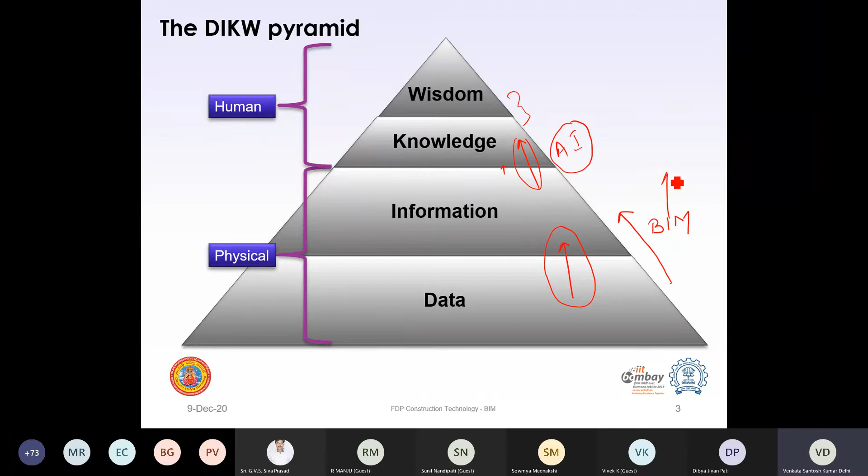How to structure data into information, and this is where probably BIM comes into the picture. So we will talk about this whole idea, and that is why this I stands for information. This is information because we are trying to structure a lot of data which is present in my site into certain structured, layered models, what we call building information models. We will talk a little bit more on this.

But if you forget everything I am blabbering out here in this presentation, you should understand this: there is data which we are trying to structure, and BIM helps in that. And if we try to take some knowledge-based decisions on it, then we are entering the realm of artificial intelligence, etc. And machine learning probably helps you to process information into knowledge, or probably process data into information. So it's essentially the tool which you use to do that. So we will talk a little bit on all these things in this presentation. Let me see. Okay.

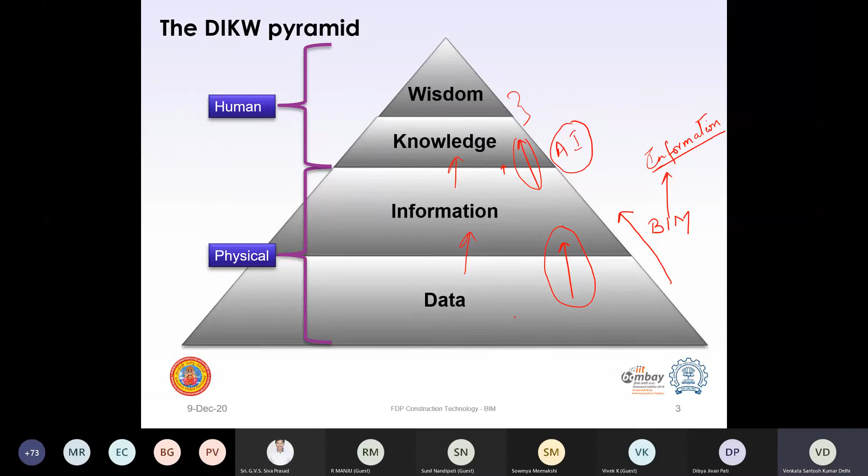So what is the key challenge in our construction projects? Okay, so people have come up with so many things. People say there is a lack of money, there is a lack of human resource, etc. But I would say the key challenge on our construction projects is handling the data and information.

Okay, so let me give you one example of this. I hope many of you would have looked at this kind of figure. In fact, in the management context, this picture is probably one of the most abused pictures of our times. So I have taken a shot at this myself to look at the story of our construction projects. Okay, so this is what it is.

Okay, this is how the customer described to a project manager, saying that I need a swing, probably 3 steps. I don't know why that is required. Probably he has 3 kids, but I don't know why that is. But this is how a customer described to a project manager. Now, how did she understand? This is how the project manager understood it.

Okay. Now, what's the problem with the second picture? There is nothing you can do. You will go and hit the trunk, right? There you cannot swing. Then this became a real challenge. Now, what is an information challenge? Because you did not translate the requirements properly, it will become an engineering challenge.

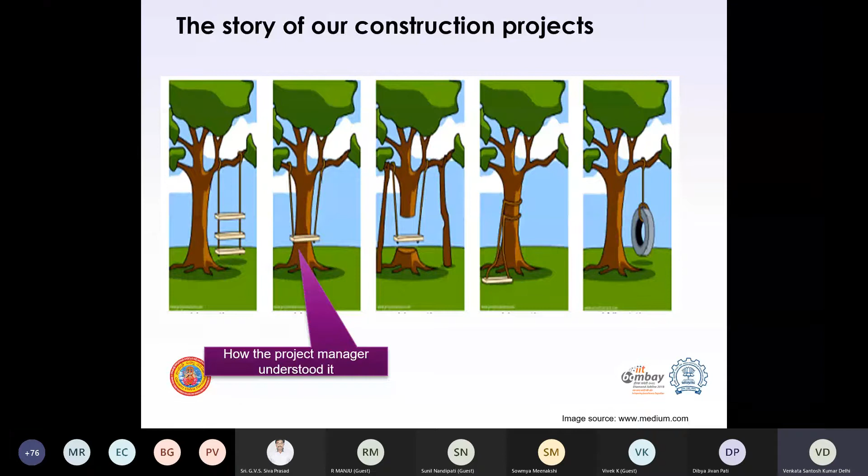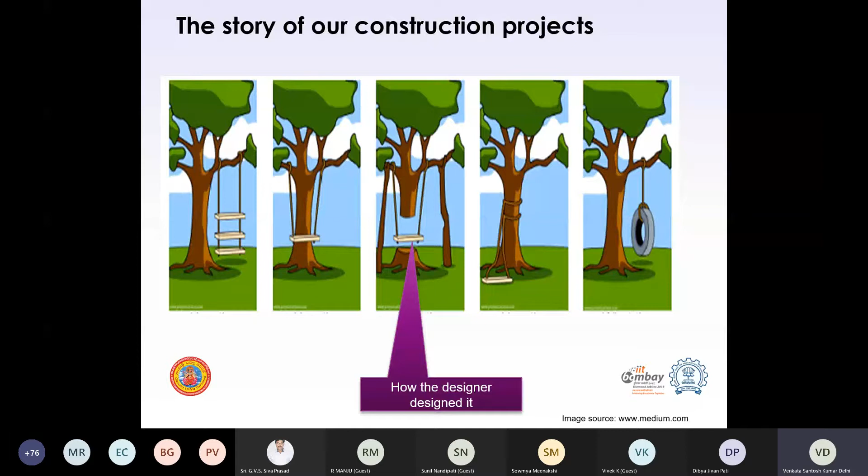That's what happens. And this is how the designer designs now, saying that, yes, the customer wants it right at the middle of the trunk. Customer is God, customer is important, so we cannot violate that rule. So what I will do is I'll put 2 supporting branches and then let the swing. But then the problem is who will sit here? Probably you have to lie down and swing if you want to do this, right?

If you look at the famous quote by Steve Jobs, he said that a customer doesn't know what he or she wants until and unless you show them what they want, right? So this is what he quoted when he was presenting the iPhone for the first time. So it's not a problem of this particular industry, but it's a problem with every industry where the client requirement is not usually translated to the actual structure on the field. And in construction, it becomes really complex because you cannot visualize everything.

Okay. I will give you a drawing. You're all construction faculty, students, etc. I'll give you a 2D drawing and say this is how your house will look. You will still need some time before you visualize what exactly the house would look like. You might still have a problem in understanding the spatial component, whether my bedroom is large enough or small enough. Those are some things which are very difficult to visualize from a 2D drawing, right? And that's the first challenge which people have understood, and that's where the BIM evolution has started.

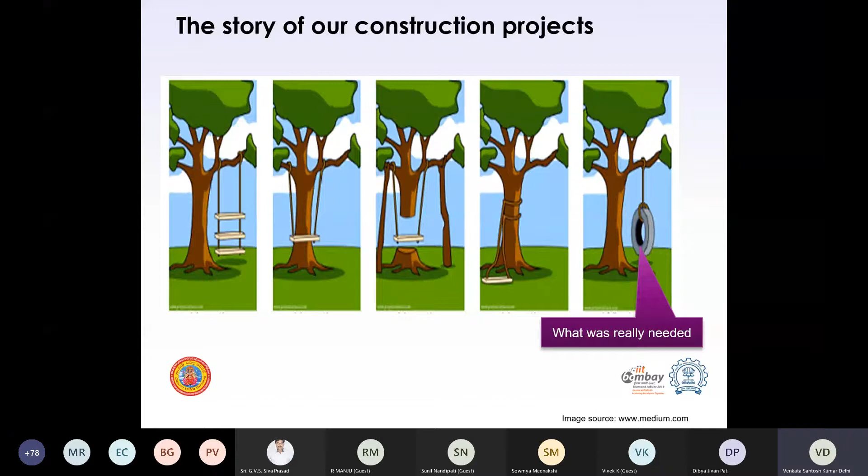Okay, so this is our construction story. Now the challenge is there is plenty of data. There is a lot of data which gets generated on construction projects. There is no scarcity of data. You go to any construction project, you will find tons and tons of data and documents. There is a project office, one single room fully dedicated to this kind of data, etc.

The key challenge is to process this data, to organize it, to structure it, so that it will be useful to us. So we are entering from that realm of data to information. That is the key challenge, and that is what BIM is trying to answer. Okay.

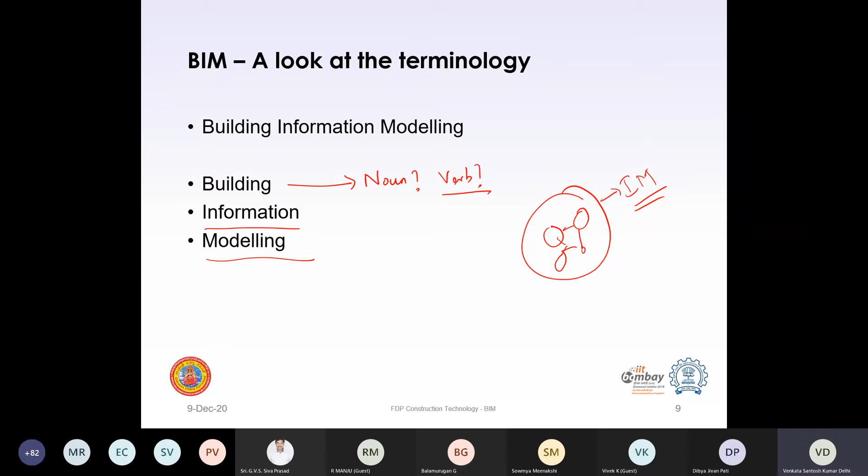So the modeling here doesn't really mean 3D modeling or 4D or 5D, whatever. We'll talk about all those things in a moment. But it really talks about how to structure data to get the information model. So if I look at building information modeling, though there is a lot of hype around it, people use it in a different way across different things, but because you have attended this course and seen my lecture, it's good to just stick to this kind of meaning where you say building is about construction, the process of construction.

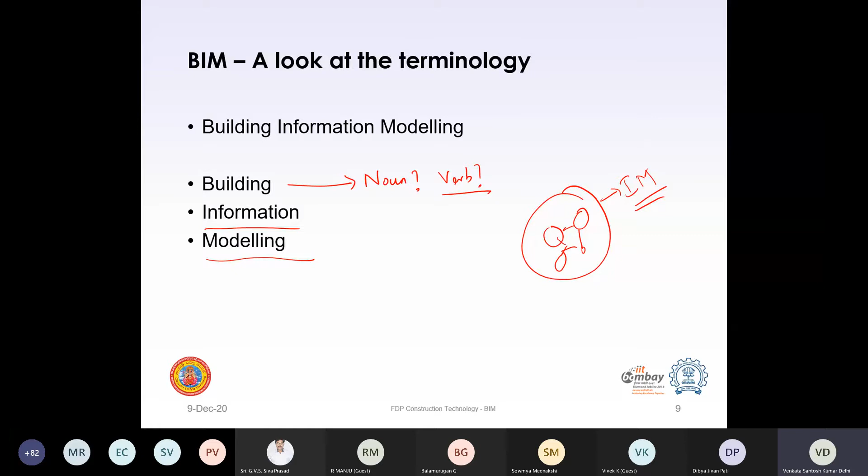Information is good because it will structure your data, etc. Modeling refers to the generation of that information model. So when I'm talking about building information modeling, I'm looking at how best to structure my data in construction so that it will be meaningful for me to take some kind of decision for the projects. So that's the idea. The same thing is reflected in a lot of definitions, but they have some kind of orientation to one or the other.

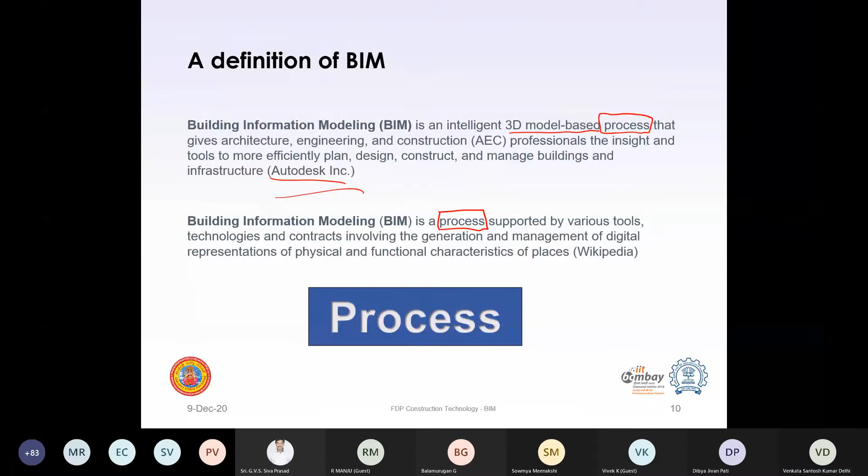So to summarize whatever I talked about so far: BIM, if I look at it, is a new paradigm of information management on construction projects. It's about how do I structure data, how do I structure this whole thing and put some context into the data so that I get meaningful intuitions out of whatever information model I structured out of the data in a construction project. I keep saying information and data throughout this lecture because I want this to be reinforced in you when you go out of this lecture.

So it's a common information model among all the project stakeholders. That's all it is. Probably you have been shown, and will be shown in the next few days, many models like this. This is a BIM model generated by one of my students. The 3D visualization you are seeing here is just a small outcome of whatever BIM can do. Because the information is modeled, because the data is there in a nice organized manner, this 3D modeling is but an outcome of that information model.

So I have some kind of idea that this element is placed at some XYZ coordinate. Somehow I've structured that data and pieced it together so that the software now knows that at that position I have to place that element. Now it's a very natural consequence that if I ask it to generate a rendering, it will immediately show me this nice picture because it already knows it.

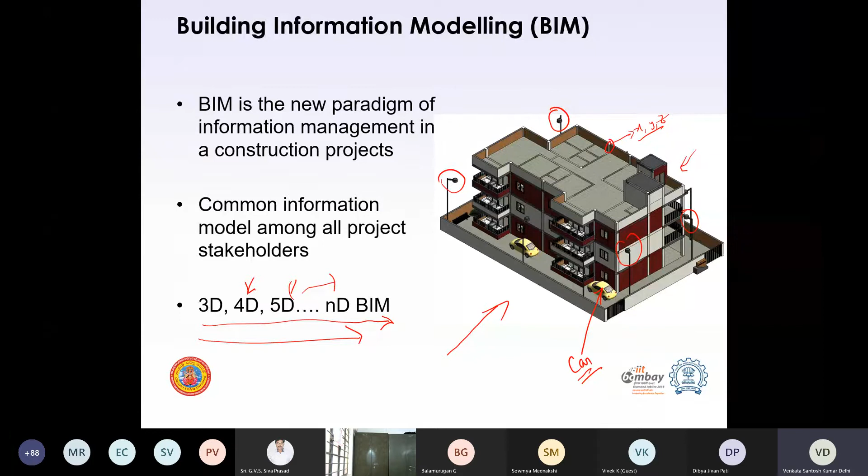If I want to know how many streetlights are there, it will tell you. If I also want to know the wattage of the bulbs used in streetlights, it will tell you that, because that information is modeled into the project. So that is how BIM has been progressing. In any software, if you have hands-on experience with it, you will see that you can put a lot of attributes to any object which you model. That is why this full tool becomes a... Okay, so some key characteristics: 3D representation, as I told you.

The other one is parametric modeling. It's a very interesting topic; we will talk a little bit on that later as well, probably about 15 minutes from now. But because BIM has information about how different objects are connected to each other, I know that a window sits in a wall. I also know that there is a door frame, and then a door which sits under the door frame, etc. If I change an attribute, it automatically gets reflected in the entire model. If I change the wall dimension, the connections and everything get set accordingly.

Not only that, because I'm using a template for a wall, if I change that template, all the walls using that template will change. So instead of brick, if I change the template to, let's say, an AAC block or some fly ash brick, all the walls automatically get updated. And then you have control over which data should be updated in which objects. So that is a very important model. Because all the objects have parameters, if you change some parameters, the model gets updated automatically.

Now this is very important, because if we come back to our problem, if I change the depth of a beam, automatically there would be some indication to the HVAC systems saying the compatibility is not there, we'll have to see what to do. So it can take an intelligent decision where it can reroute itself, or it will leave it to the designer to reroute. So this whole idea of parametric modeling is enabled by the use of building information modeling.

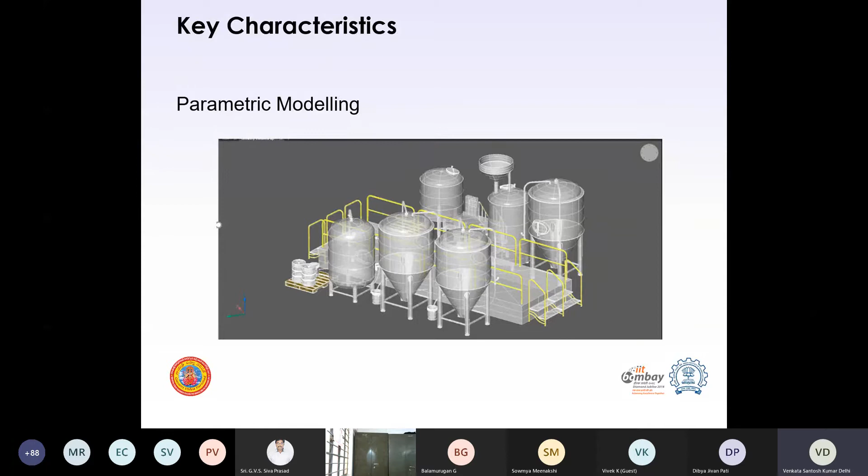In a few minutes, I will tell you how this whole idea developed over time. So now we discussed what BIM is, how it is founded in information theory, etc. Let's talk about how BIM developed over time. Where we are probably also stuck in India is looking at 3D visualization: how do I visualize it? There are two very famous representations it started off with, which took the basic 2D drawings and tried to understand them. One is what we call constructive solid geometry, which said that every object can be modeled using a cube, a sphere, and a cylinder.

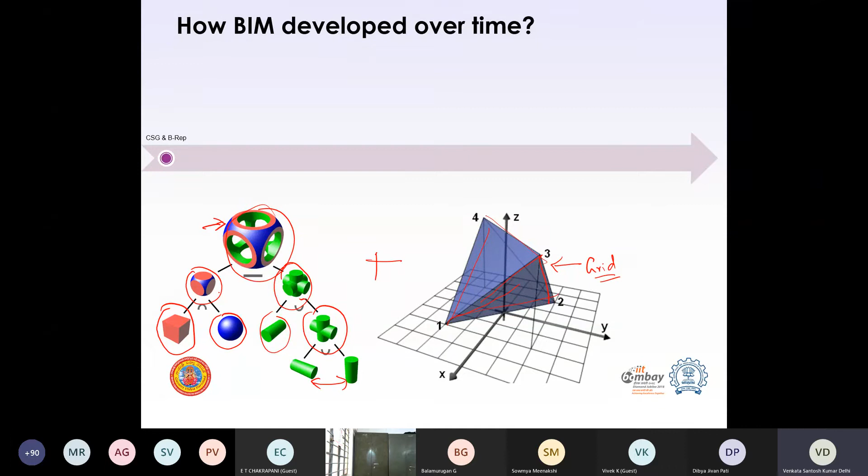Then people realized, I have to probably... give me a second. Resolving, yeah, thanks.

So then the first comprehensive BIM tool probably is the Building Description System. It has a very nice 3D representation. It's very interesting. I don't have a snapshot of that software, but you should look at it, BDS, and in fact this BIM history is also well documented. You can search for it on the internet. That's probably one of the better softwares which tried to look at BIM as an information model.

Then there is another software called RUCAPS, and it's very interesting that some of the inventors of such softwares actually went and developed Revit afterwards. It also started looking at grids and analyzing how to do this whole idea of 3D. Then most of you might be aware of ArchiCAD. ArchiCAD came in and looked at 3D. It's one of the major advancements in the entire digitization space, where you started rendering drawings, etc.

Then this center at Stanford started off, called the Center for Integrated Facilities Engineering. They pioneered what we call 4D BIM. They started off understanding that we have to visualize construction through time; only then will we understand how to manage it. They started with what we call 4D CAD: how the drawings evolve over time, let's do some rendering on it, etc.

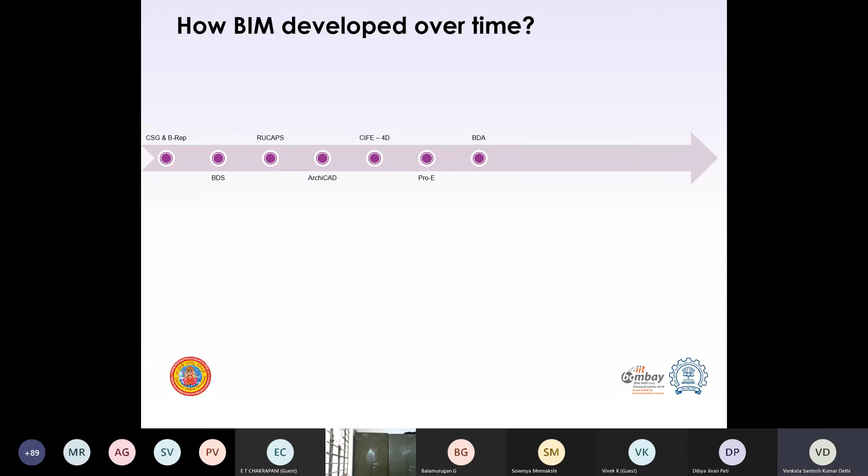The BIM, as we know, started probably 20 years ago or so with the advent of these things, BDS, and then it transformed to what we call Revit, and the architects of BDS were instrumental in developing Revit as well. Revit's interface is quite intuitive, and that's one reason it became popular across the world. But there are a lot of softwares today, and people always have a certain affinity to certain software, but these are some of the milestones in BIM.

Revit has objects which you can place and other things. It's quite easy to place families. Families are essentially the classes, etc.

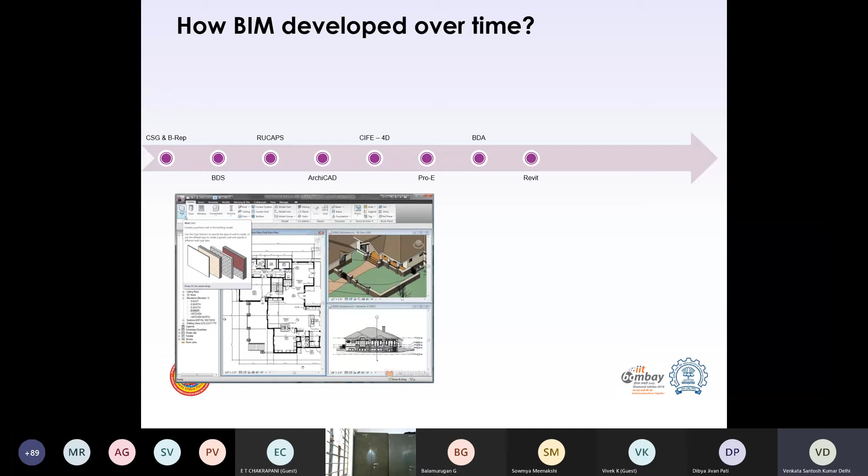Now we talk about what we call collaborative spaces. What we are talking about is that we should be platform agnostic. What do I mean by that? It means that it doesn't matter if I am using Revit and you are using something else. If a structural engineer uses STAAD Pro, it's all fine. But then this information should all be modeled and structured. There should be a process on how to analyze the data and structure the information. So that's the space we are talking about in BIM today.

Okay, we are talking about collaborative spaces. You look at Bentley Academy or Autodesk University, all of them talk about this now. It doesn't matter which software you come in with, because especially in construction you have this issue: the contractor is different from your structural designer, who is different from someone else. All of them have licenses to different software. Their skills are in different software, so you cannot force a single software on all these people. And there is no single software which can do the entire thing BIM promises to do, right?

So essentially now we are looking at these collaborative spaces, and that's the reason why I emphasized a shared model, not a single model. So you have different models. The structural designer will still have the STAAD model on which he or she will be working, but then there is some kind of process, some kind of interfacing with the common data environment. So if something changes in the structural model, it gets reflected in the common data model. If I am an architect, I will always see the same interface, and if some changes happen from the structure side, I see them as changes in my model. So that's the holy grail of building information modeling.

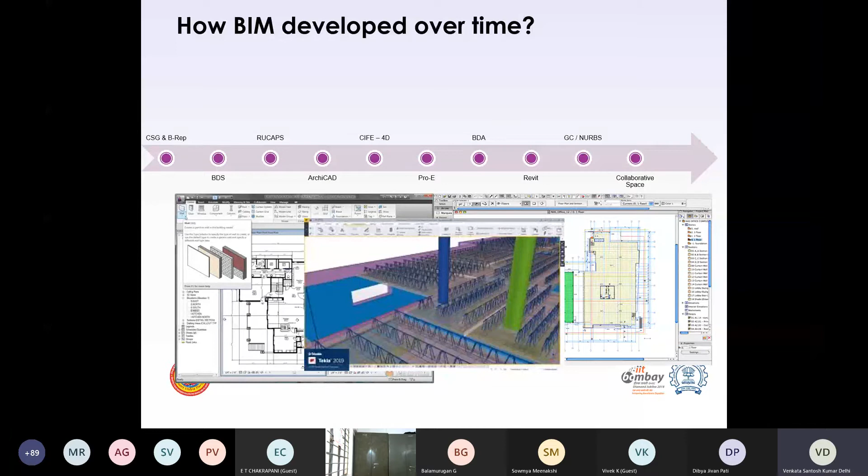We're still not there. There are always glitches because all these softwares are proprietary in nature. They have their own interfaces. So there is always an information loss when you move from one software to another. So we are still in that space of interoperability. We are still figuring out how to do that, but we are getting there now. Okay. So I think that's how BIM evolved, and that's what we should look at.

So what I would probably take you through in the next 10-15 minutes is what BIM can do as of today, and what some of the advances in BIM are that you would see in the next few years or in the next decade or so. That's what I would focus on in the next 10 to 15 minutes.

I think this is what most of us are attracted to. In fact, many of the clients are attracted to it, right? It's a realistic 3D rendering. Very nice. This is from Wikipedia. All the images which I use are either my own or open source. So you see that it's quite nice, right? In fact, some of the renderings are so realistic that you don't really understand whether they are real or artificial. So you get a sense of the space, and probably you will get some sense of some inefficiency or something.

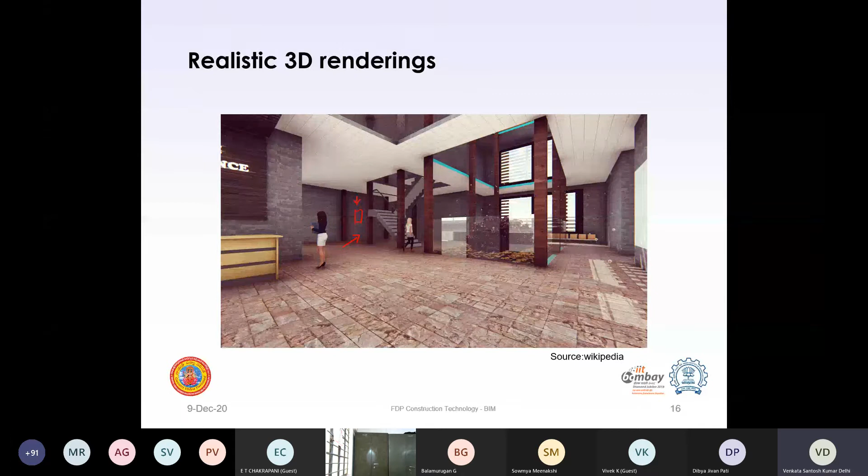So you might want to say that maybe this space can be used better, right? Maybe you say, okay, I will put a small light here and hang a painting here, and that way it will become nice. You can always think of that, and this becomes a huge value add to the clients. We'll talk about process in the next session, and you'll see that such renderings are very important for clients to understand and fine tune their requirements, and that's one thing which BIM can do very nicely nowadays.

General arrangement, GFC, good for construction drawings, or whatever you want, for processes like stamping, client approval, and other things. And it's very good because earlier, when you had a drawing, for example, if you changed the detail of a beam here, you had to look at corresponding sections in different drawings and change them accordingly, and somewhere you would miss out something.

Whereas nowadays, if I just change something in the model, automatically all the drawings get updated. There is nothing which I need to do there. Now that is one use case which unfortunately the industry has latched on. The entire idea of BIM is to eliminate the use of 2D drawings, but somehow it has fed into this whole nice use case as well, which will stay for some time.

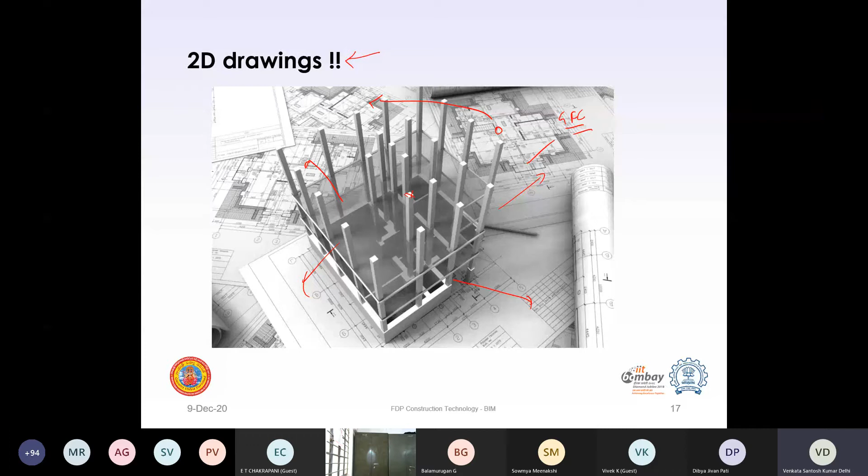But soon you'll see that with the use of BIM 360 and other forms of BIM where it's available on your phone, etc., the need for drawings might go away. But it will be there for at least a decade. So I think that's a good use anyway. Then you can generate these nice walkthroughs. Let me see if I can.

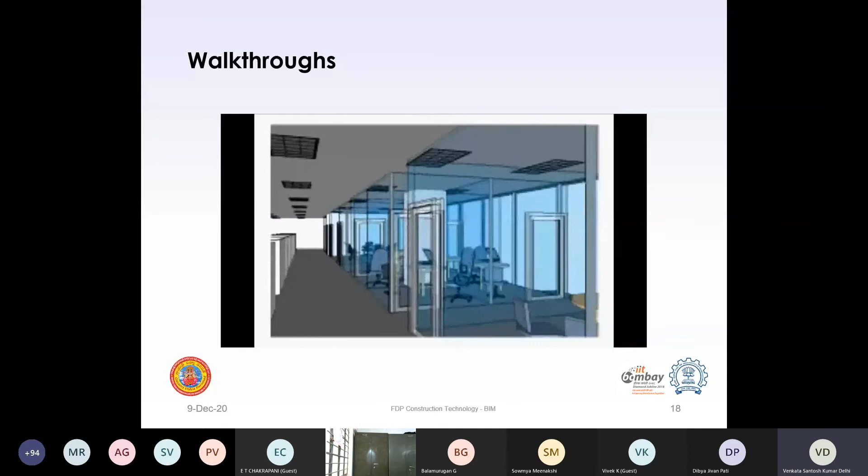This is again a small walkthrough which was generated from one of my earlier courses. You see that, and believe me or not, you can generate it in just a click. Probably you have to spend about 5 minutes after you have a BIM model to define how you want to go through it, and then you can generate.

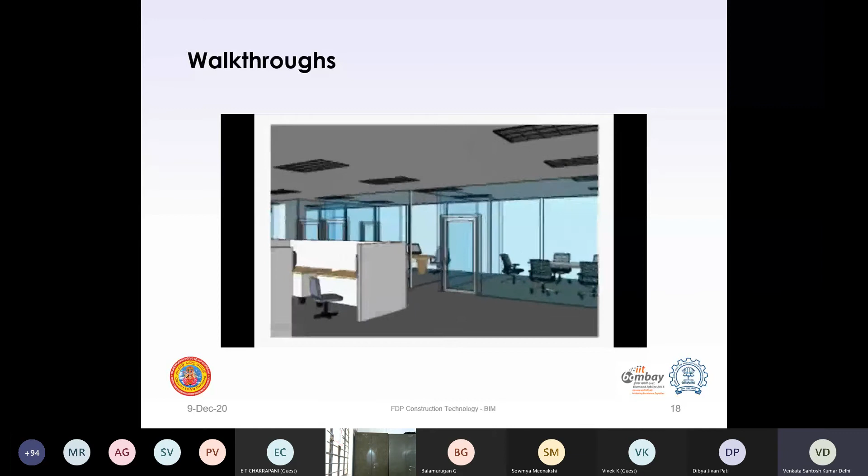This is for an office space somewhere in the country. And you see it's very realistic. You get a sense of how the corridor would be, how the manager's rooms would be. It's a nice way to look at things.

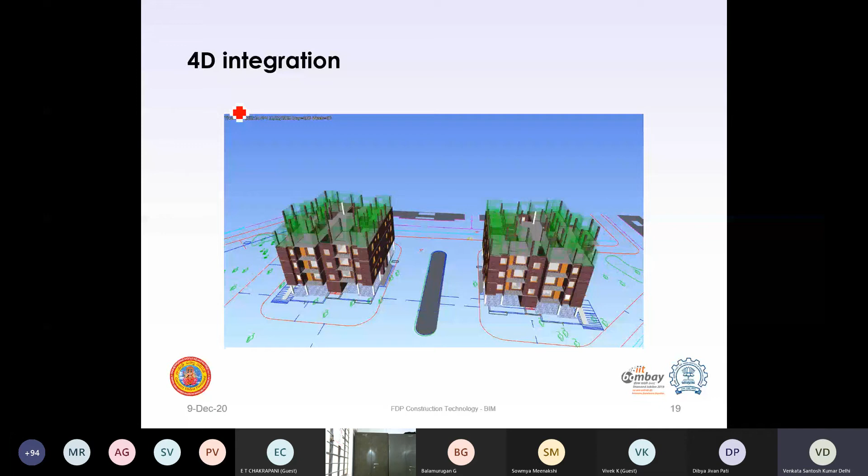Now this is something where people will talk about 4D integration. So this is again a model, so you will see how the building can be constructed. If you look at the top left corner here, you will see that it's changing. If I play it at a very slow rate, it will tell you exactly what week, what day, what element is getting constructed.

So essentially what you did was you took the BIM model, then you took the schedule from Microsoft Project or Primavera or even an Excel sheet, and then you integrated them, and the go-to software right now is Navisworks for this. When you do this, you get this nice integration.

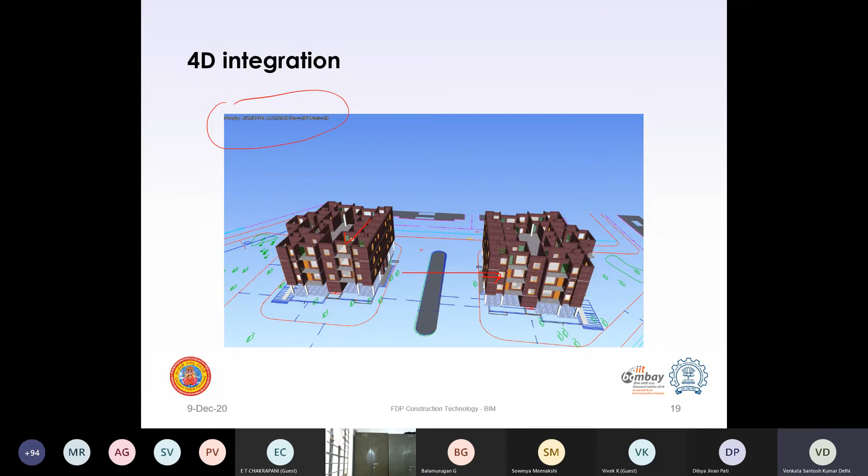So what I can do is take a snapshot here and say, on Monday this time, this is how my building should look like. Where are we? You can pose this question to the construction engineers, and probably they will say, yeah, this building is all right, but this building we are still at this level because there is a problem. Then you can go and update the schedule, and that gets reflected in your as-built BIM model. So it's an interesting way to look at things. Let me see if I can skip it.

This is very important, because if you detect this problem after you go to the field, there's a lot of rework. Sometimes the work might stop for a week or so till the designers figure out how to rectify the clash. There might be some options, whether I have to drill a hole in the beam, or whether I have to reroute the cable. All these kinds of discussions will happen, and there would be a stalling of the work, or there could be rework.

You would already have built the wall, now you have to make a hole in it, you will have to get some equipment to drill out, etc. So this kind of rework, this kind of stalling of work, you can address upfront. And believe me or not, when you get the first iteration of the structures, architecture and mechanical BIM models together and run a clash detection, which is quite easy to run, you'll see thousands of clashes. It's not an exaggeration, you'll literally see thousands of clashes in a decent size construction project.

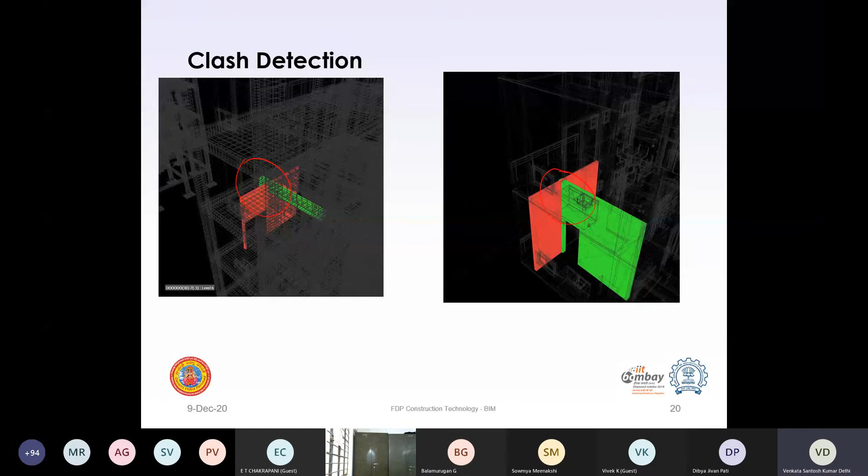Similarly, you can do a lot of things. Okay, so there are so many things I can keep telling you. In fact, I have a course on BIM which runs about 6 months at IIT Bombay, and we keep talking about all these things. Okay, we say quantity takeoffs, cost management, life cycle analysis, building energy modeling, facilities management.

There's so many things with the existing thing what you can do. Okay, so there are ways in which you can do this. It's probably out of scope right now to tell how to do it, etc. At some point, probably you can explore these things, but it's very important. I'm here to talk about these things. Okay, so that's what I will do in the next probably 7 to 10 minutes.

Some cool advances what you see in the BIM space now. First and foremost are what we call the generative designs. This is an interesting concept. What you see is a little bit of what I talked about. Okay, you can automate the different design process. So instead of a cylinder, if I want a cone there, okay, all I have to do is to change some parameters in some automation, and literally you get a slider here.

Okay, you get a small slider, and with a mouse, if I try to slide that from left to right, I see how my shapes differ. Okay, especially for architects, this becomes a very interesting thing, because now they can play with different forms and understand how that will happen. So the entire geometry. So you have some softwares, some third-party vendors which create these generative design aspects for you. Because it adds huge value, because now you can show different kinds of design to the client and get it approved.

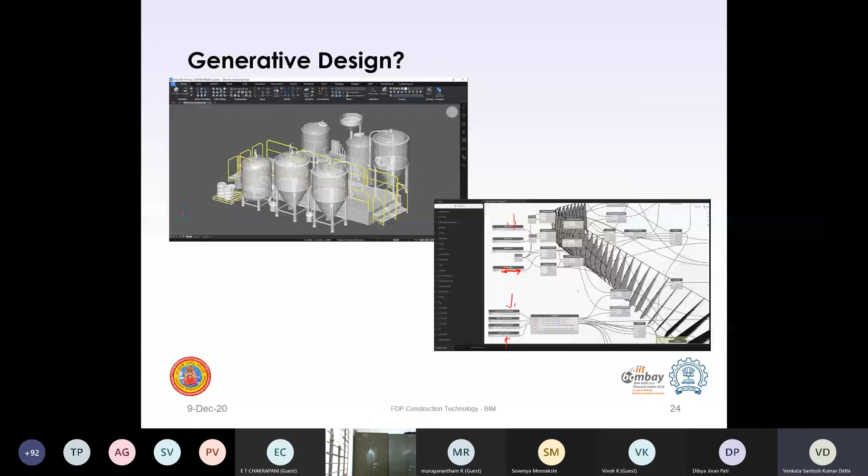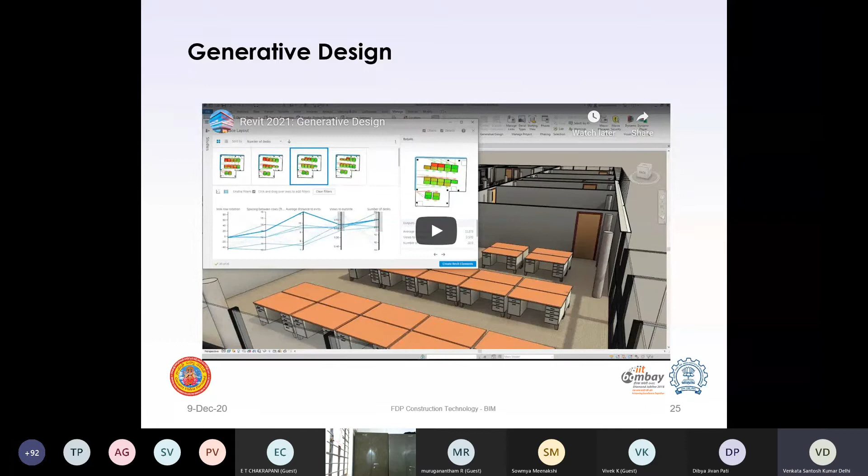But the software vendors have also understood the importance of this. So this is Revit 2021. And this is what Revit does, right? It gives the version 1 year earlier. Okay, so in 2020 you already get a 2021 version. Okay, so in the Revit 2021 version, you see this generative design coming up. Okay, so I will quickly show. This is from Autodesk, a video on YouTube. You can check it out. Let me just mute it so that I can talk about it.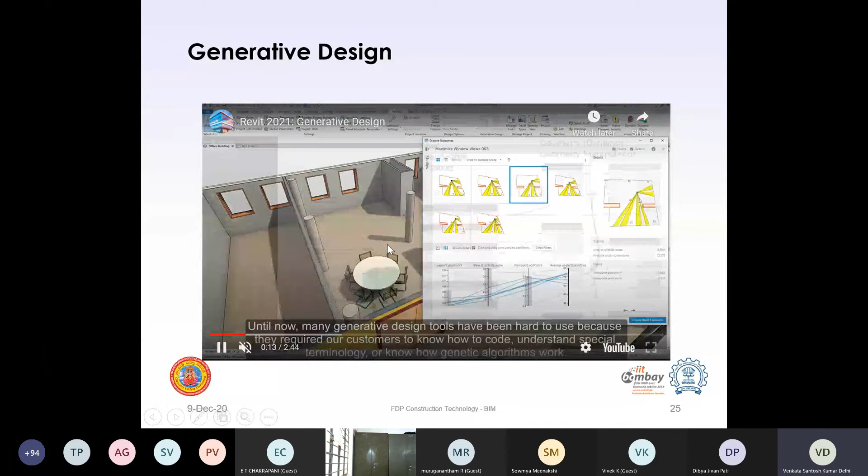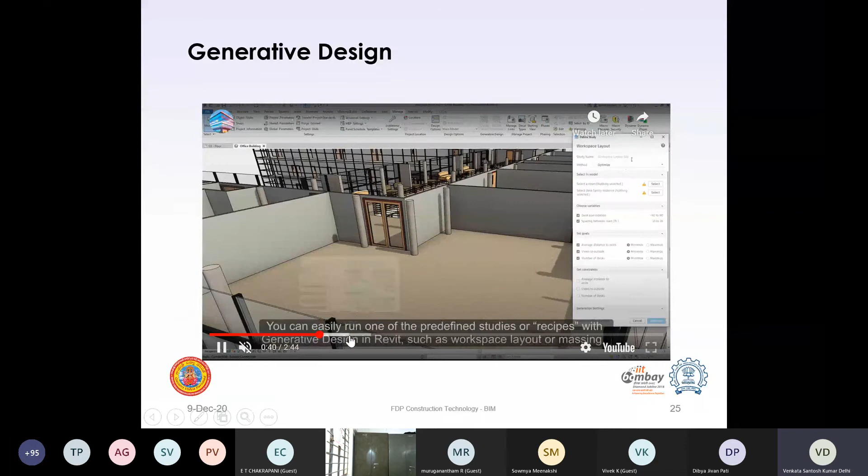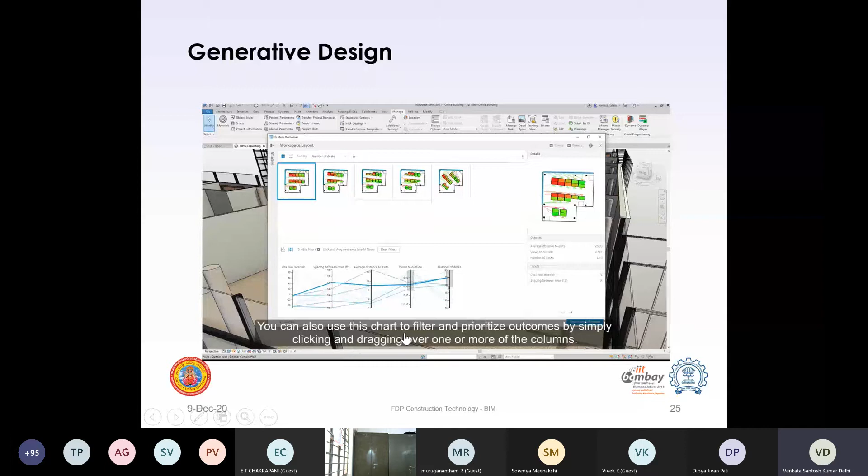So essentially, this is something where they are trying to maximize the spaces which have a window view. Okay, so you can see that this kind of thing has already come in now. Okay, so you can optimize your work layout, where you say, okay, this is my workspace. I'm just skipping it because you can watch it at leisure on YouTube if you want to. And you see the sliders there. Once you slide it up and down, etc., you get very optimized details of how to align your workspace.

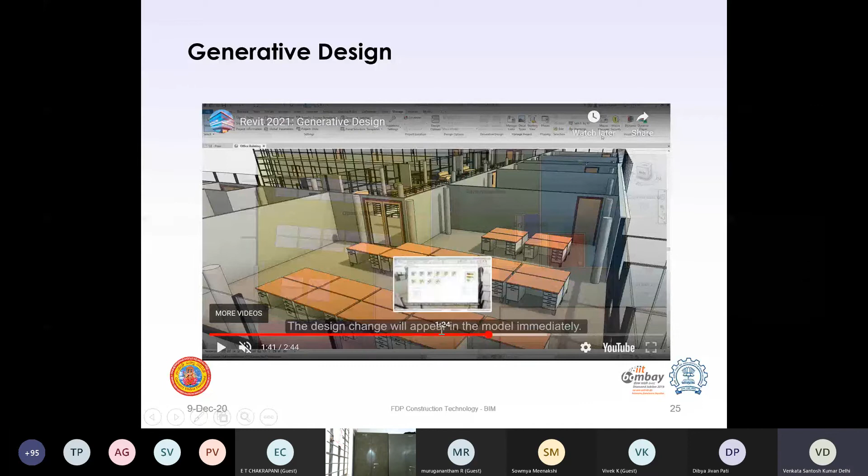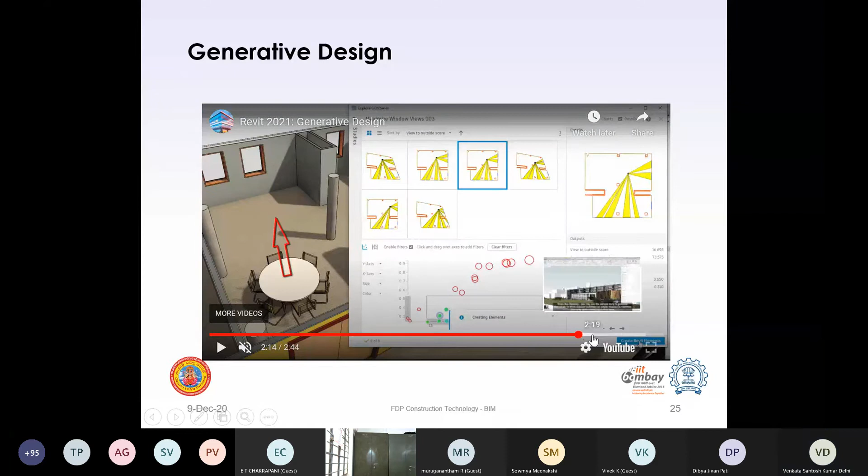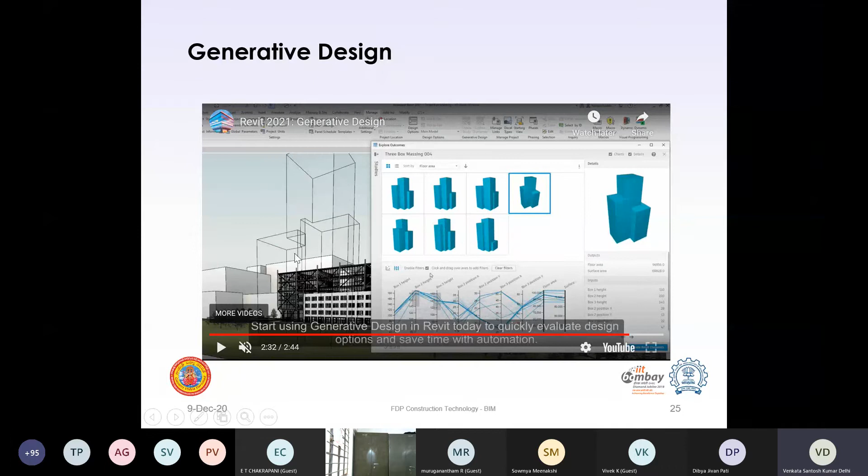So this is probably what they have said, that this is how the workspaces should be put so that they get maximum ventilation out of this building. Okay, similarly, you can do it at a large scale. Okay, so let me just show you one more thing. Yeah, you can actually do a lot of shape analysis and then see how best to look at the form of a structure and finally decide that this is the best thing from an energy and a sustainability point of view. Okay, so you see on the left side here, this kind of structure.

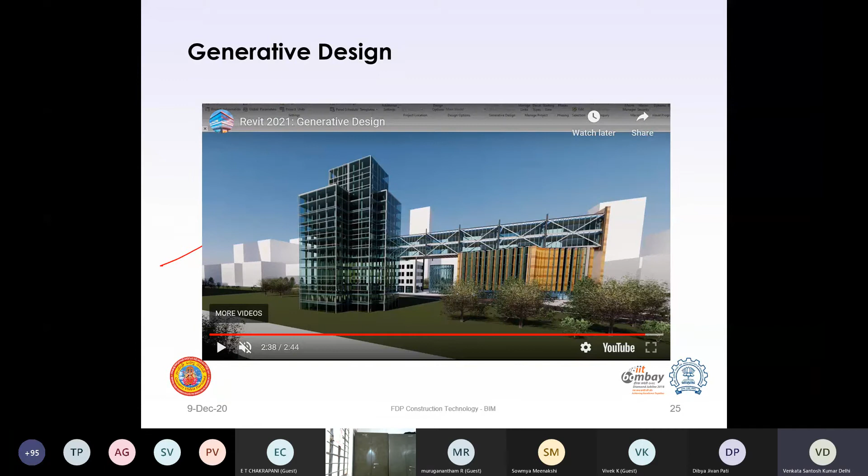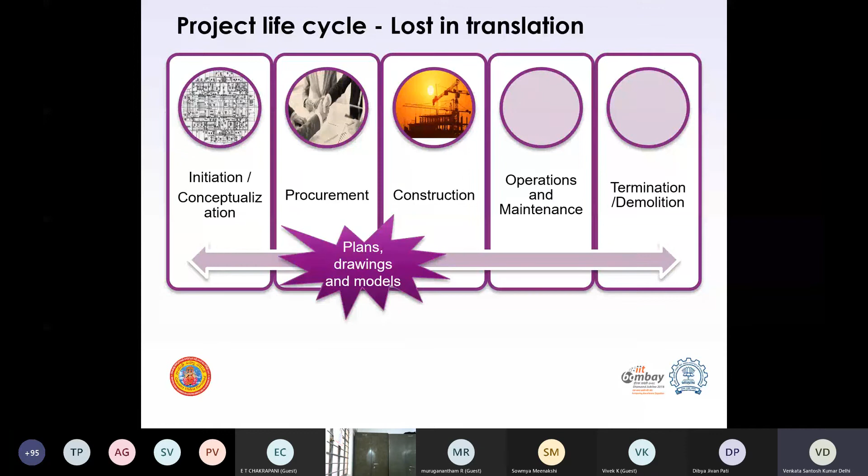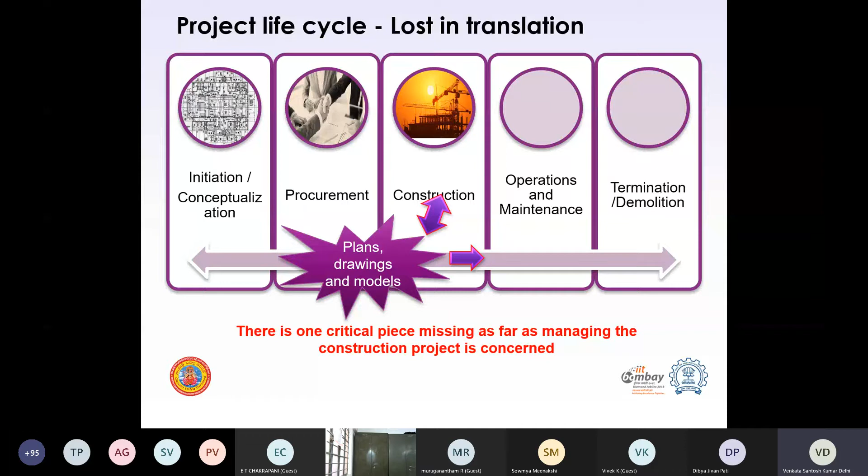And then you generate it. So there is a nice generative design component which is happening in this advancement. Okay. Now the other one, what you see is how it can be used across the life cycle. So again, let me just skip a few slides for want of time. But the major problem is you push information to the site, but there is no way you get information back from sites. That's what the other advancement in BIM is targeting, where I get data from the sites and then restructure it back into my information models. So that's the second aspect, what we call the as-built BIM.

Okay, because the feedback is an important cycle, and if you look at your PDCA and continuous improvement and all, this feedback is a very important cycle. Okay, so you look at plan, monitor, control. You always have some data from the field coming into this cycle in your management process. So this information flows from the field, but what would happen?

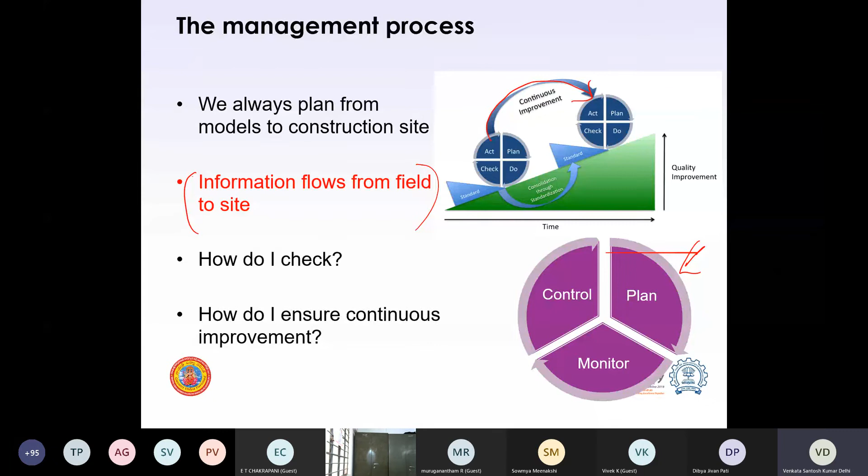Some, and I want to flow it back to the model. Okay, so that is what we are looking at: from the field back to plans. So you have these nice feedback mechanisms like daily progress reports, all these things which people fill out every day. So what you will see is essentially these daily progress reports, etc. now can be structured back. Okay, how do I do it? There are ways in which you do it.

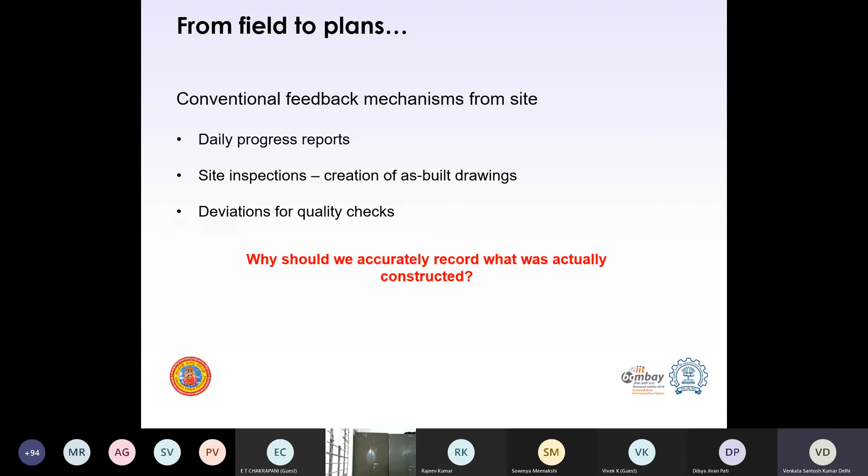One of the things you do right now is what we call as-built BIM models. We use technologies like laser scanning, etc., to generate BIM out of point cloud. So this is one building at IIT Bombay on which we did a laser scan. So you get your LIDAR, the terrestrial laser scanning systems, and then you place it at different points, get the point cloud, and then use that to get a BIM model which can be then looked at. Okay.

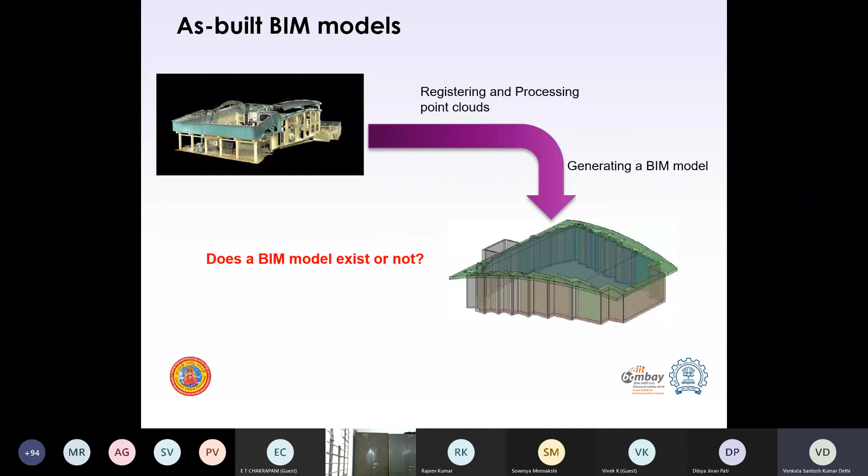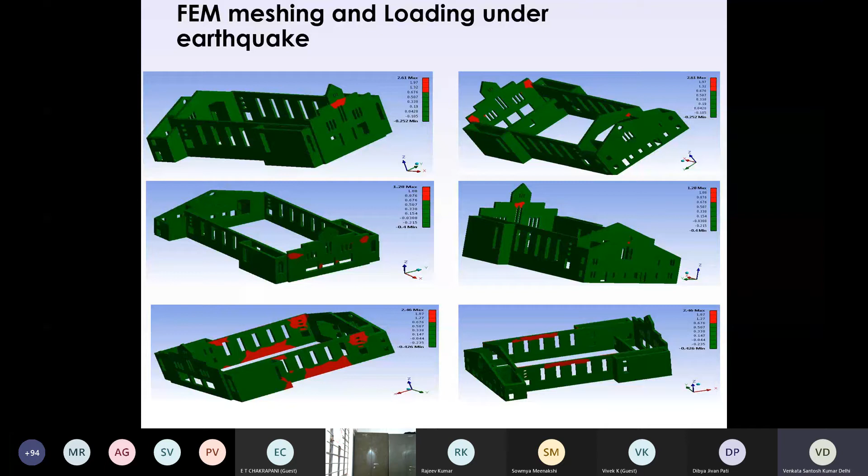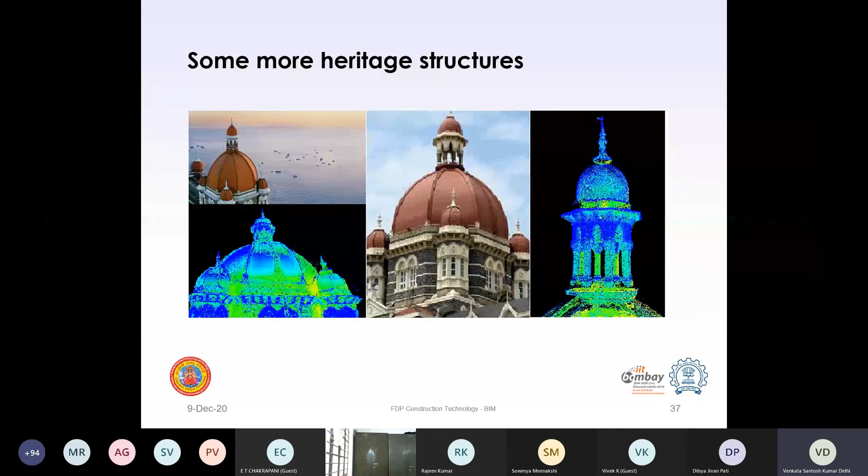Now, we have done quite a few things. I'll just quickly show you a few. Once you have a 3D model, you can then use it for, let's say, earthquake engineering. You look at the seismic vulnerability of such kind of building, etc. So you can actually do a lot of information processing once you have that kind of building, right? So this is some heritage structures in Mumbai where we have done this. There's a team at IIT Bombay which does these things. It's also headed by Professor Raaj Ramsankaran. I'm thankful to him as well.

Now, the third aspect. I have four aspects. I've told you two aspects, right? One, about this generative design. Two is about the data from field to the model. The third one is how do I visualize this? 3D models are good. Can I have better visualization of structures? And that's where you have this whole idea of augmented reality. Okay, let me show you some things.

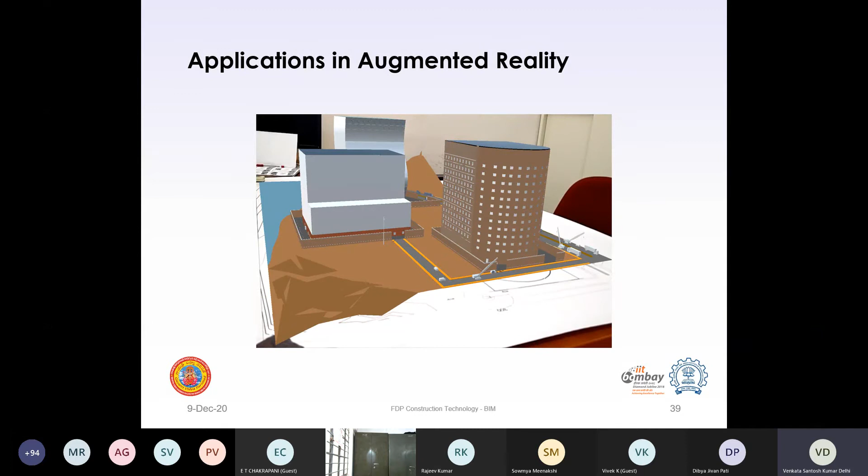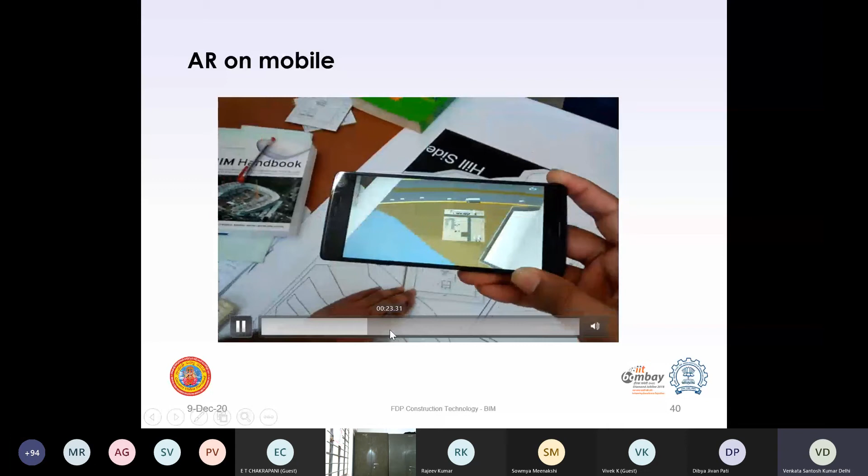So this is how the drawings might look. This is essentially what your phone renders on a drawing. It might be the way people will start discussing in meetings probably 5 years from now. So this is a person who is looking at a drawing from his mobile phone, and you see that the mobile actually renders the drawing, and then it shows you the orientation of the site. And then I can have a conversation with another person by actually rotating this.

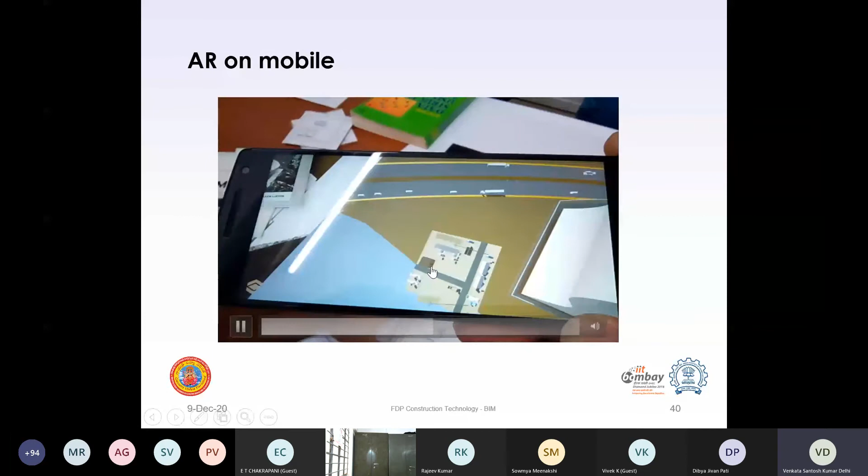This is a system which was developed at IIT Bombay by one of my PhD students. So you have these augmented reality applications nowadays. So the drawing is not a drawing anymore, though you still use drawings. You have BIM which powers these kinds of augmented reality applications.

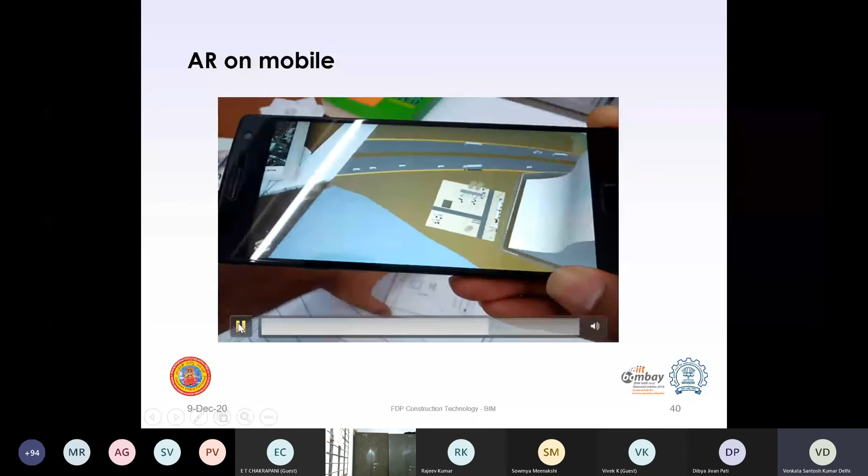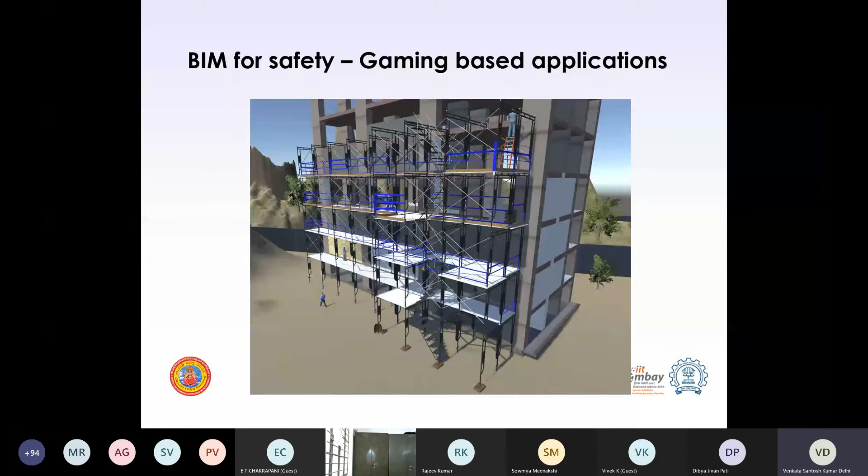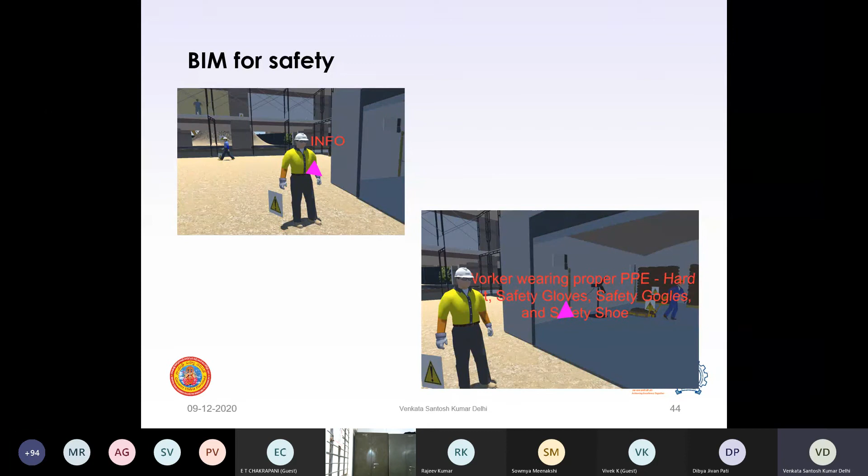Then, this is essentially a mobile-based game which was developed by one of my PhD students, where you can look at different aspects of safety. Essentially you go and click on someone, and then they will talk to you. There are quite nice features in this. Then you can go one step ahead and put it in a VR box, in virtual reality.

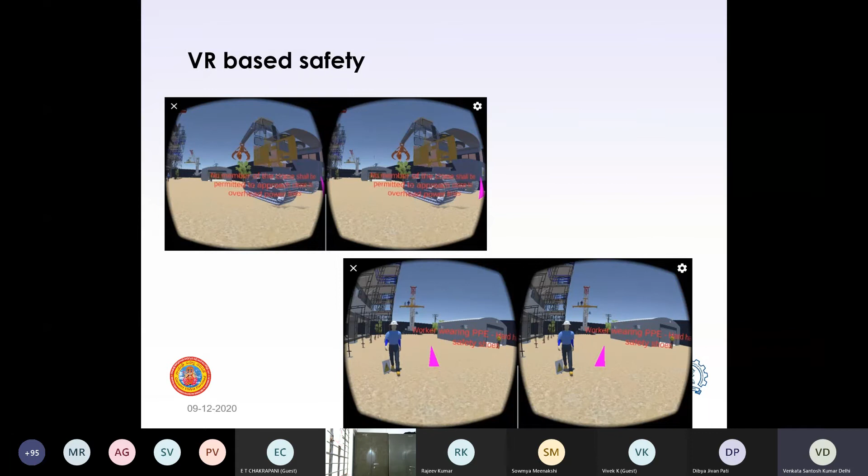So you wear this nice VR headset, and you are transported into this virtual world, and you can actually walk through this entire site. And then there will be people talking about what the problems are. If you go someplace, they will say, no, you cannot come here, this is an equipment-only area. It's an interesting tool for safety training. Many sites are looking at these virtual reality based safety trainings nowadays. So you see that it's quite realistic.

So this is how my lab looks sometimes, where people start playing these games in VR and then try to develop these apps. Some of my PhD students doing that. The final thing will probably take about 2 minutes. Then we have about 10 minutes for discussion, and this is where I would like to emphasize the final cool development.

What you see, I've discussed 3 of the 4 cool developments which you will see in the next few years. The final one is this jump from information to knowledge. If you remember our pyramid, from data to information to knowledge to wisdom, this jump is the next development which you will see in BIM and related applications. So how do I transition from this information to knowledge, or can I generate some knowledge systems based on these information models? That's where AI and ML can come into picture.

The first and foremost thing is, can AI and ML be used to better understand and implement BIM itself? Can I use artificial intelligence and machine learning... for example your generative designs, etc. All these things come from this idea, where you are talking about how do I use machine learning, how do I use artificial intelligence to better structure my data so that I get an efficient BIM model. So that's one area.

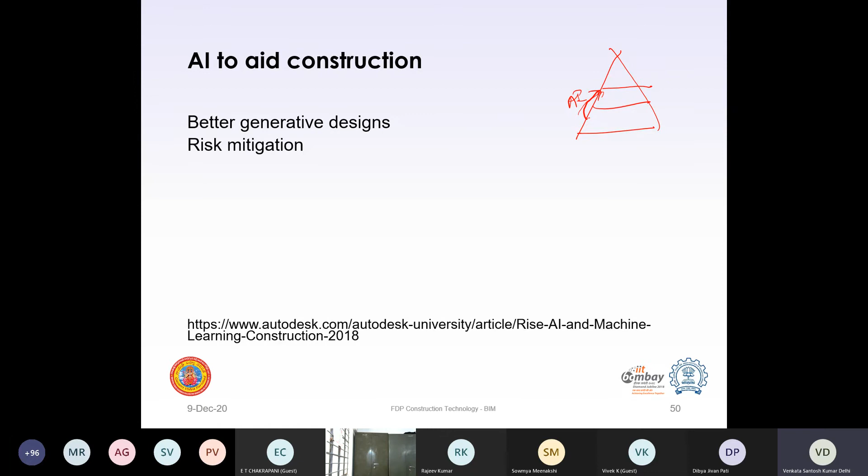Now this is something which people are looking at right now. Again, if you look at it, this also comes from this entire thing, right? This explicit information is about data and information. Can I look at semantics which can go ahead and do it? Are there places where I need not define that this should be the case, but people know that that would be the case? Because the system knows that in this context, this is the appropriate one to put in.

Or let's say I am building a nice ocean front apartment. Is there some kind of implicit semantics and geometry which the system already knows, and then it will align all my apartments to maximize the sea view, or a hotel with a number of rooms maximize the number of rooms with a sea view. So this kind of experience systems, where this is what people preferred whenever they were building a hotel on a seafront earlier. That's an experience and knowledge which the system itself brings in before you start designing the model. That's what we are talking about when we talk about semantic enrichment.